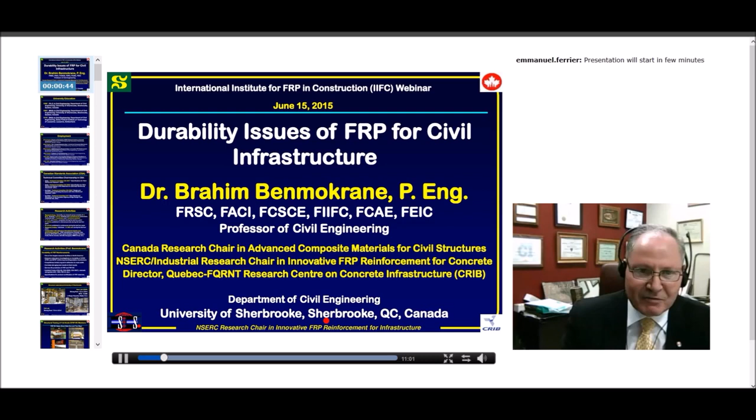Briefly, my university education: I graduated in '79 in civil engineering from École Polytechnique Fédérale de Lausanne, in Switzerland. Then after 4 years as a consulting engineer in Lausanne, I moved to Quebec, Canada in '82, at University of Sherbrooke, and I completed my master's in '83 and then my PhD in '86 at the same university.

From '95 to 2009, I think some of you know that we had here in Canada a research network of centers called ISIS Canada, and the impact of this center was really huge here in Canada and in North America. So during 14 years, we worked in this field of FRP.

Internal, external, and also we worked on structures monitoring using fiber optic sensors and things like that. This was a huge achievement made through this network of centers, with a lot of development of codes, design guides, and so on. Still now, the Canadian industry and also North American, and I can say also the world industry, are still benefiting from the findings of this Canadian Research Network of Centers of Excellence.

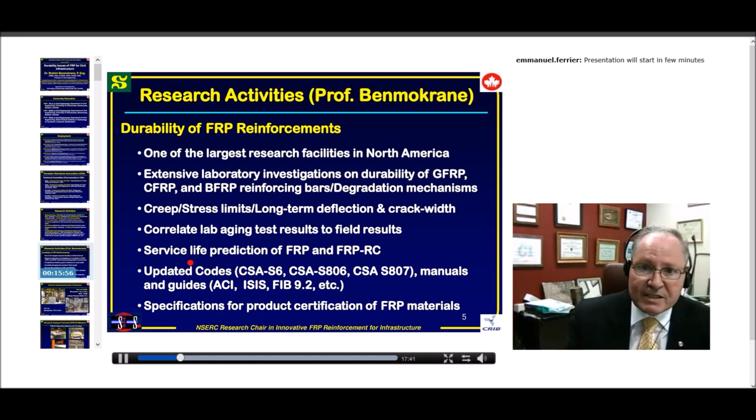Briefly, before going to the main topic of today, I wanted to show you some projects that are already completed, or some that are ongoing. You can see here, I will be coming back to the durability and material issues. So here I will be showing the next slides mainly about structural testing.

This is a view of the old structural labs that we have. It has a strong floor, 10 meters by 20 meters. You can see here one full-scale underground chamber under test. We can see here in the back a shear wall, and here one bridge pier under testing, and so on. We have many graduate students using it.

Also, in 2009, we had a new structural lab, which has a strong floor 12 meters by 20 meters. We have an MTS machine, 16 meganewton, and as you can see, some L-shaped reaction walls, 12 meters. I use these walls mainly for testing shear walls. I am planning in the future to test here a building with 4 floors, including slabs, beams, and columns, internally reinforced with FRP, and look at its behavior under gravity load and also under lateral load, mainly for seismic.

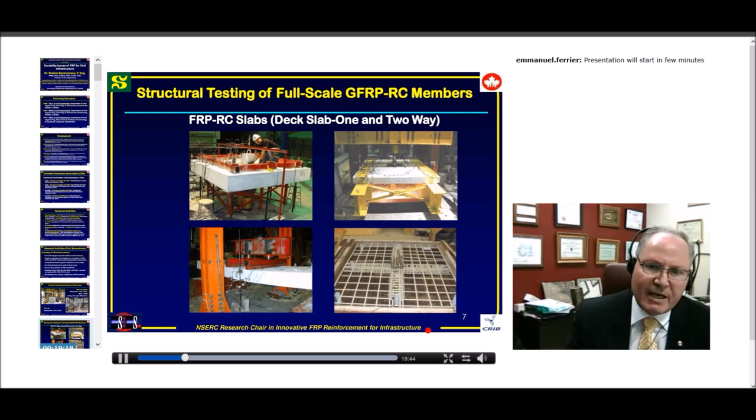These are all structures that our lab and graduate students have benefited from. Here's some of the specimens. We can see FRP reinforced slabs, deck one-way slabs and two-way slabs that we tested during the last few years. This is a two-way flat slab for parking garages, and this is a two-way slab for bridges. You can see the flexure reinforcement and also shear reinforcement made with FRP, as shown in this photo.

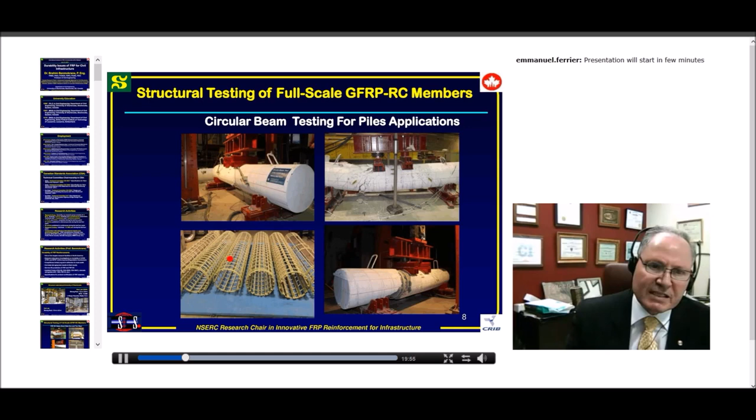Also, we tested circular beams, mainly for pile applications, under flexure and under shear. You can see here the internal reinforcement, the cages.

Also, as I said before, we tested shear walls, mainly to look at the seismic behavior, mainly for building applications.

Just recently, in fact two weeks ago, we completed testing columns. These are all reinforced with GFRP, under quasi-static loading, looking at drift, energy absorption and so on. We got very interesting results — some of the columns went up to 8% drift without any strength decrease, which is really very good behavior. We looked at the behavior with different longitudinal reinforcement and also different lateral reinforcement for concrete confinement.

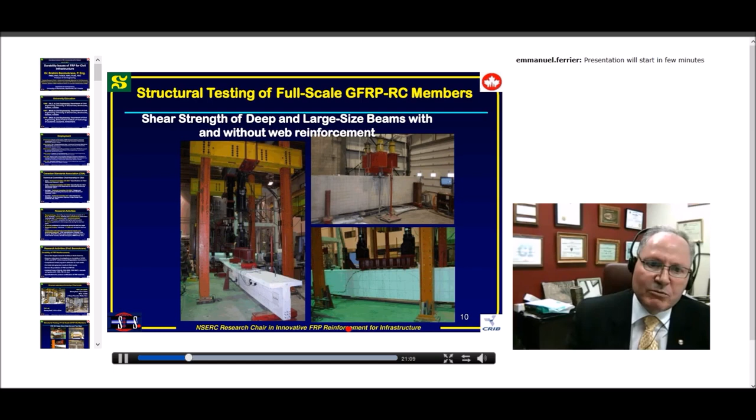Also, this is another view showing shear strength evaluation, T-beam section size effect, having 1.2 or 1.4 meter depth. This is also about deep beams that we tested with one PhD student.

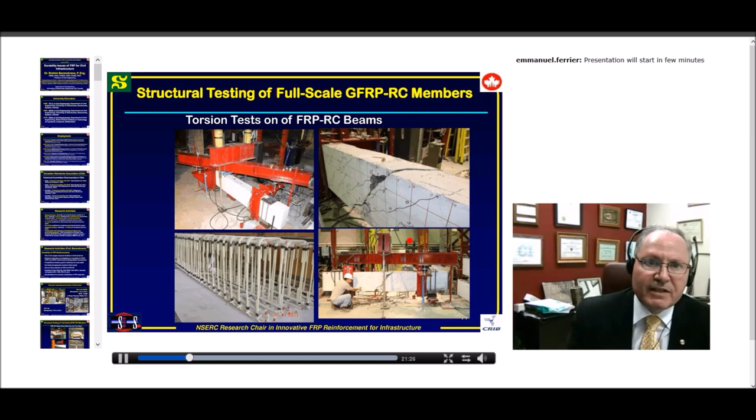Here we also did extensive work on torsion. We looked at this type of loading, which happens often in bridges and also in parking garages, to have this kind of load about torsion.

Also we tested columns — rectangular section, circular section, short columns, slender columns, with glass, with carbon, under concentric loading and also under eccentric loading. We are now establishing the moment load diagram interaction. We have really huge work on that, mainly for code development and so on.

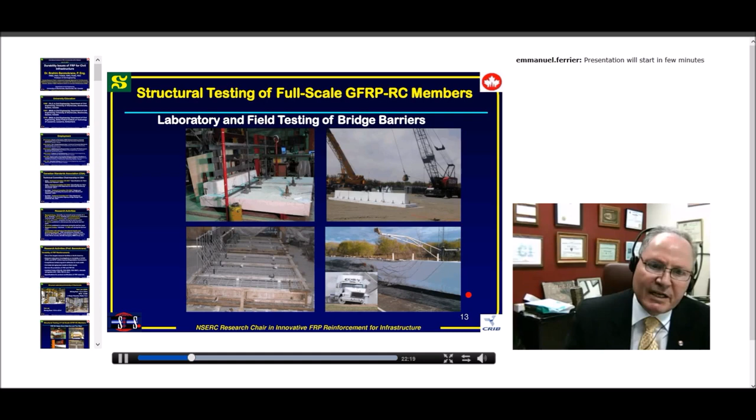And also we tested, as you can see here, bridge components including barrier walls. This is under static load in the lab, and here under impact load in the field. Also this is under crash test we did in Texas, exactly how it has to be tested to approve the material.

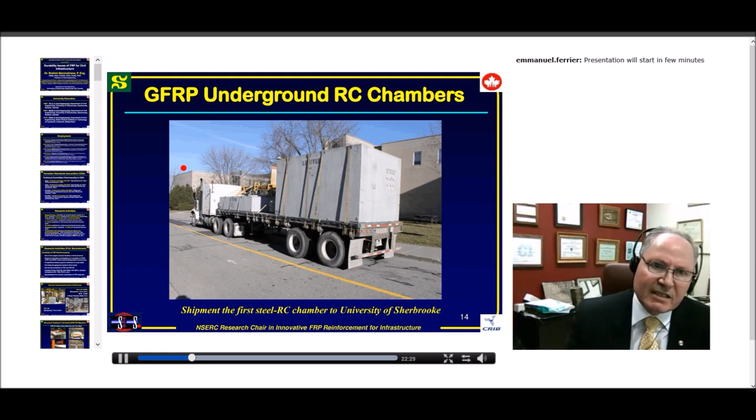Sometimes we are also bringing precast full structures for testing. You can see here the chamber, the transportation to the lab, this is during casting, and they were tested recently here in the lab. All this structural testing, of course, is from the lab, as I just showed you.

Some of this testing really helped for developing new applications with GFRP reinforcement, and of course we move it to field applications. We have to do that, as you know, because we can learn more about the material and increase the extension of the use of this kind of material.

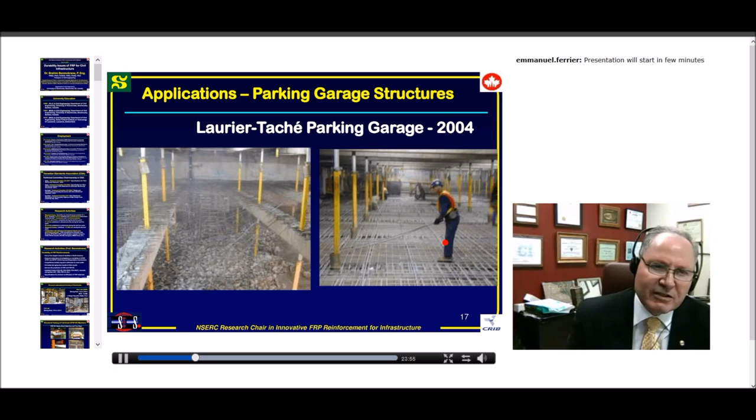You can see here another example of parking garages. This is demolition of the existing structural slab and replacing them with new slabs with GFRP. This is one-way slab, and we also did two-way slabs for parking garage. This has a span of each bay of 30 feet, which is 10 meter length — really very long.

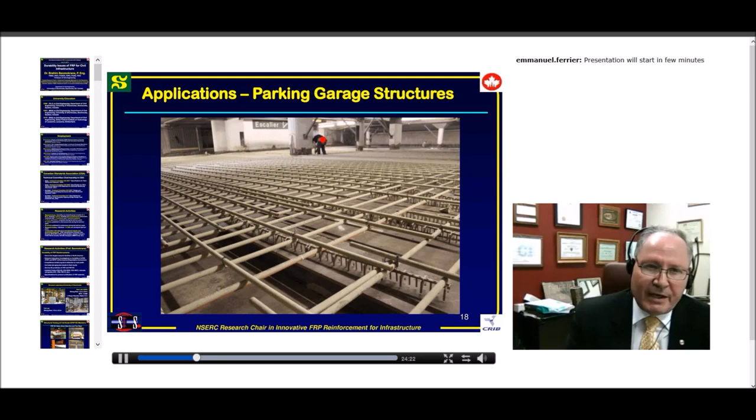It was really a challenge, mainly about the deflection, the behavior, and also about the punching shear behavior around the columns. But we addressed that very well with the designers, and all this is instrumented, so we know exactly about the behavior.

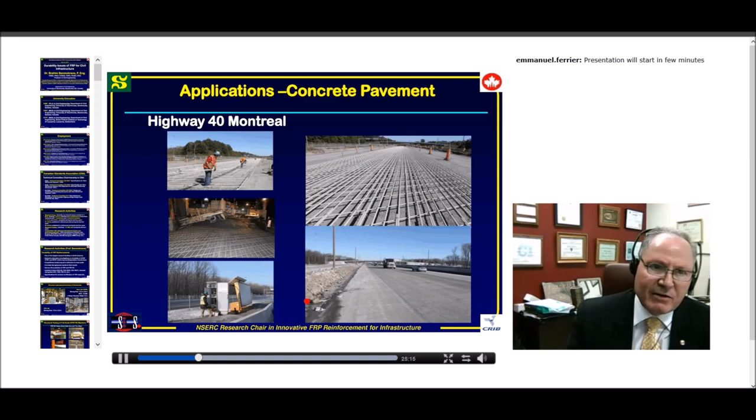We also have highway applications — this is continuous concrete pavement in highways in Montreal and also other cities.

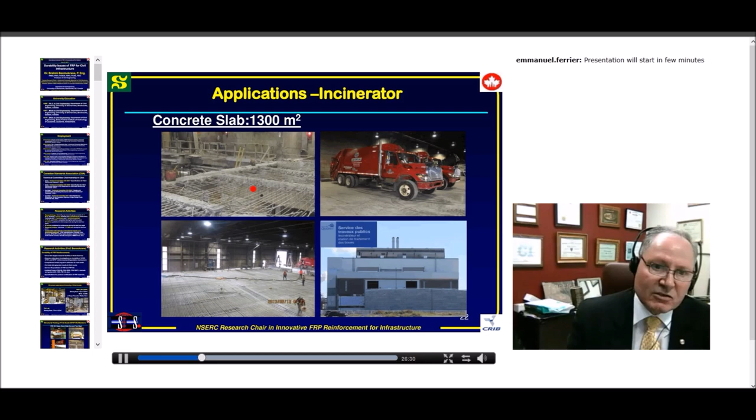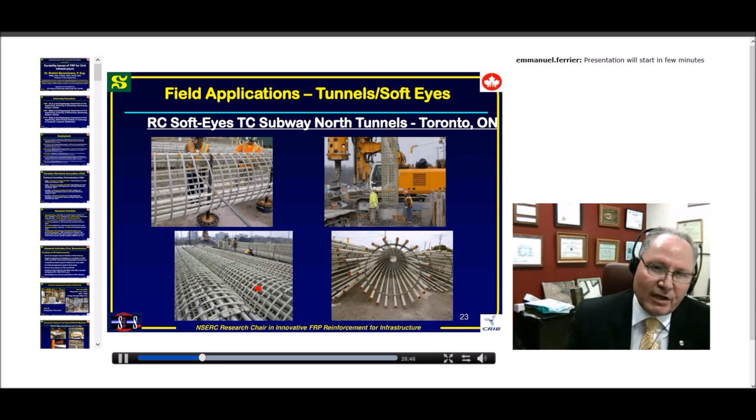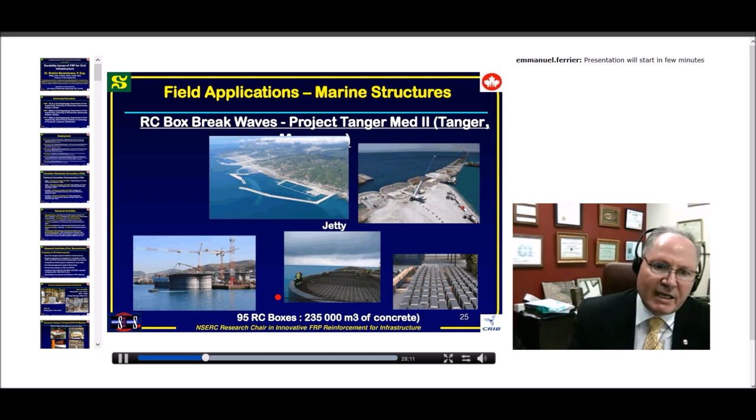So that gives you an overview of some projects that we completed in the lab and also in the field. As you can see, I think the FRP bar technology is really progressing well, and now it's being used at the international level, and I am very, very happy about that. So after this brief introduction—about 10 minutes, I'm sorry about that—I hope it was very helpful for you.

So the outline of my presentation today: after a brief introduction, I will talk about the factors affecting the durability of FRPs. I will talk about accelerated aging tests—this is how we have to do durability tests in the lab. Also, I will be talking about ISIS field durability studies; this was really a huge progress made with this field testing, as you will see later, and the acceptance of the material and so on. Specification codes and design guides—how we are addressing durability in the codes and design guides—and some concluding remarks, and I will come out with some research avenues.

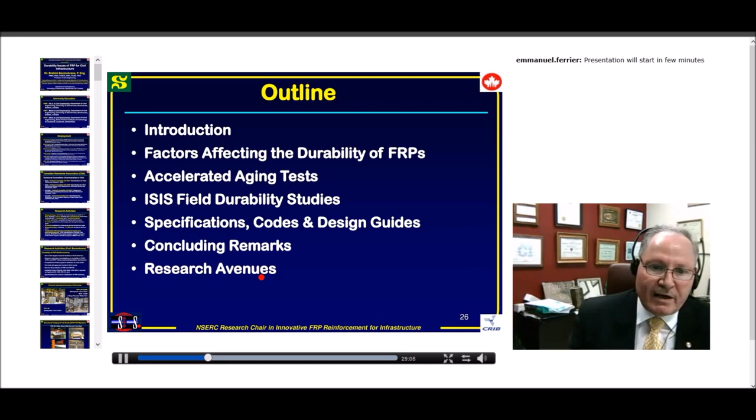Why is durability a concern? Of course, because FRP is still a new material when compared to traditional structural materials. Also, manufacturers are still doing innovation, coming up with new products or new materials, so these have to be evaluated, understanding and looking at their long-term durability. And as I told you, currently most codes are specifying a service life of 75 years or even more. Of course, the durability of this product has to be proven, that at least it will last the service life specified in the code.

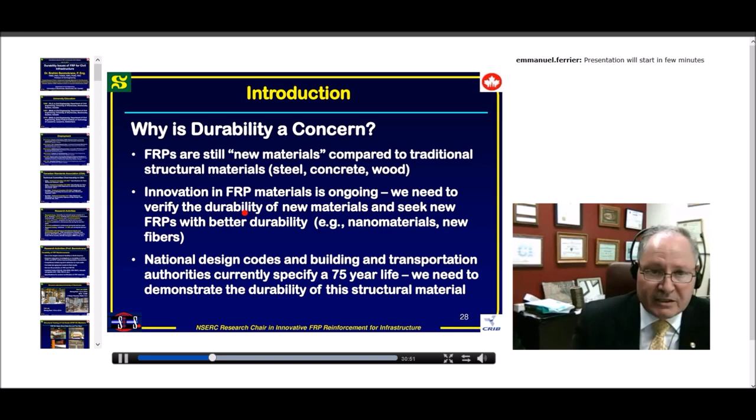Also, unlike steel, FRP is resistant to electrochemical corrosion because it's non-metallic. But however, FRP could potentially deteriorate following exposure to some specific environment. We can see here physical loading and moisture.

This is really the main critical issue, because without moisture the durability will be, I think, no problem at all. Temperature also could affect it, depending if we are talking about fire or some application in the Middle East.

Chemical exposure, of course, mainly with concrete, so we are talking about alkaline solution, but it could be also another chemical.

The rate of deterioration, as I explained before, will depend on the type of fibers, the resin matrix, and the fiber matrix interface. For example, I am working on basalt bars during the last few years, and now one of the main issues about long-term durability of basalt is really dealing with the fiber matrix interface, because the industry is still facing problems with the sizing and finding material which has really good compatibility with the resin. So it's still really under research and one of the key issues to be addressed in the coming years.

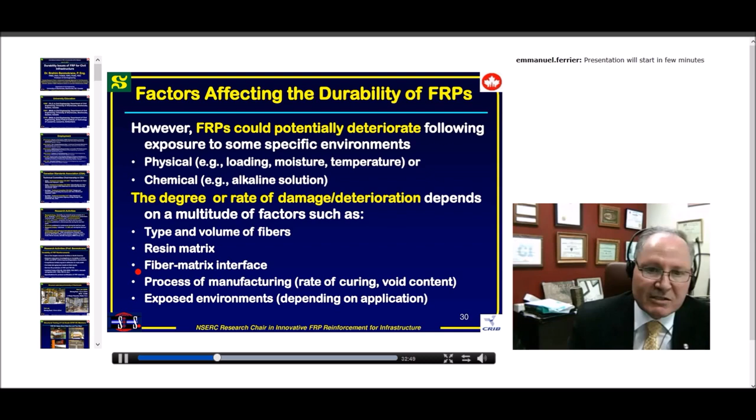Manufacturing process is also important, mainly the rate of curing and void content. I will show you some slides later about that. And the exposed environment depends on application, as I said before. Sometimes you can have freeze-thaw, in other cases marine application, and so on, so it has to be addressed.

When you have this debonding and delamination, you are losing one of the main criteria for the material to act like a composite. Because when you lose the interface, the whole system is not really acting as a composite, and you can have a decrease in strength, because there is no stress transfer between the fibers. So we know exactly how the material degrades, but we know a little bit less about the interaction, because we can have interaction or synergic effects.

As you know, by combining load and chemical exposure, we can have some synergic effect, and this we don't really know too much about. From a research point of view, it needs some study of the synergetic effect, by combining load, temperature, moisture, and so on. I can see this as a direction to look into this kind of behavior in the future.

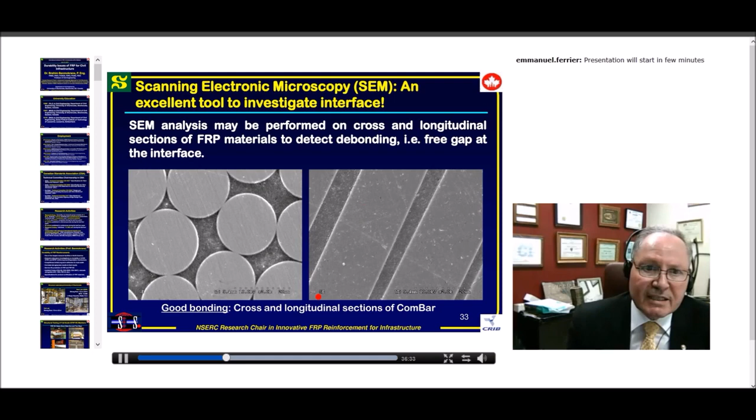And this is one of the bars. I think it's from Schöck that I did this investigation, and this is how it was done. I can come back with the manufacturing process.

If you look to the rebar, there are mainly two manufacturing processes, both made with pultrusion. Some use closed die pultrusion, and others use open die pultrusion. When you use closed die pultrusion, you don't have access to the bar during fabrication, so it's not really in contact with the atmosphere, and in general there is no void, as I showed with the Schöck.

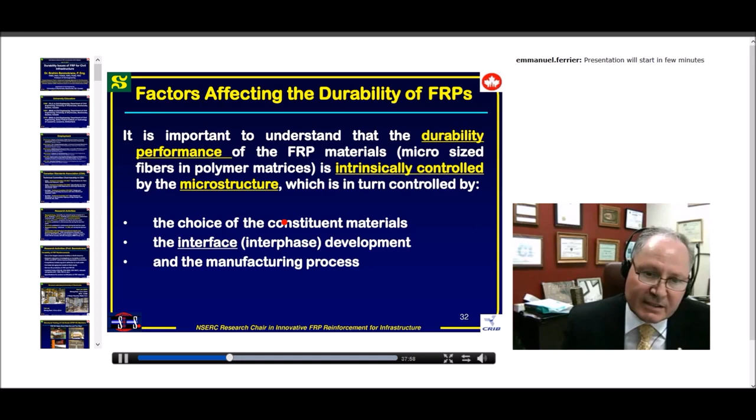But this is for the external surface, you have to add sand or do grooves or something like that after you made the smooth bars. When using pultrusion with open die, you have access to the rebar during manufacturing, and you can add helical fibers or any external deformation before the polymerization of the resin. But as you have access, it means it's in contact with the atmosphere, so you can have some pores. So the thing is to have well-distributed pores, as I will show you later. This is really extremely important.

Also about the interface characterization, you can do it before testing and also after testing, like on a fractured area, and this gives you a very good idea about the interface. As you can see here on the left, this is on a fractured area, and you can see the resin is still bonded to the fibers, meaning a really good interface and showing the integrity of the interface. But as you can see here on the right, you can see smooth fibers, and all the resin was removed because the failure was mainly at the interface, which is really poor bonding. So this will really explain it to you.

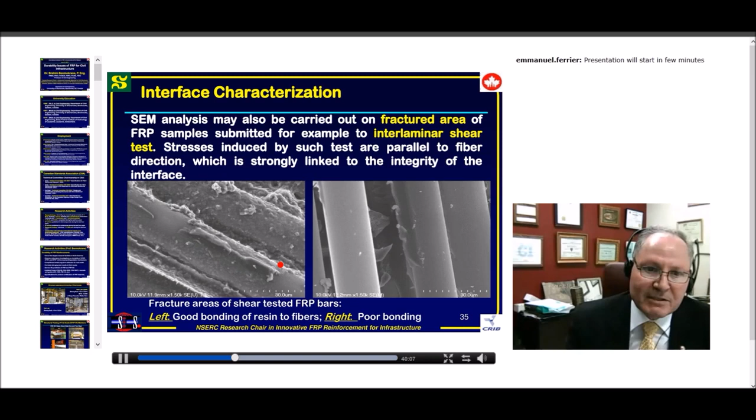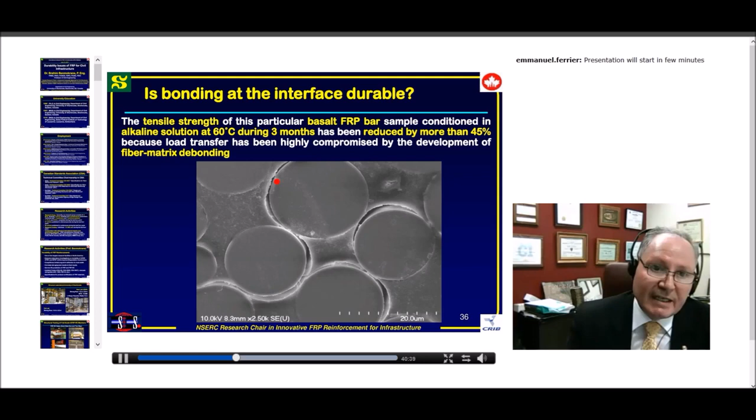One of what really happens in the interface when you have a problem with the interface, and this is with basalt bars. As you can see, this picture comes from a bar sample conditioned in alkaline solution at 60 Celsius during 3 months, and the strength reduced by more than 45%, and you can see here the fibers debonding, which induced the huge strength decrease.

Glass transition temperature is really a thermal property which is extremely important. We can do that with DSC, or we can do that with DMA. We have ASTM standards on both methods. But either way, it gives a very good idea about the long-term stability of the resin, and by investigating the glass transition temperature, we can know more about the behavior of the resin.

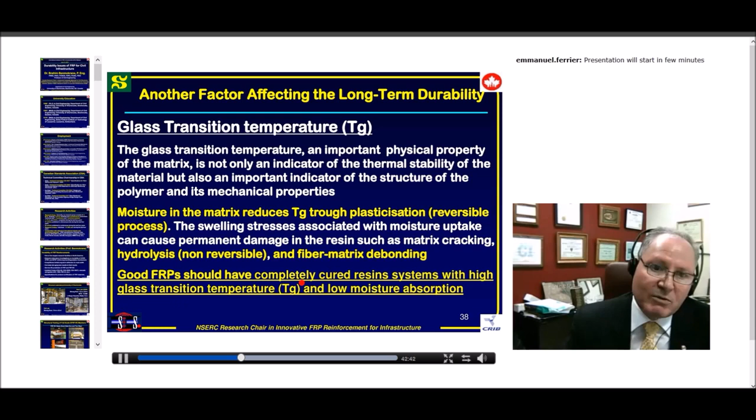As you know, when it's made by hand layup, we also have to consider this thermal property, of course.

This is the result from DSC. We have cycle 1 and then cycle 2, and as you know, because we did cycle 1, we already heated the polymer resin. This shows that there is post-polymerization happening. But when we did cycle 2, it's a continuous straight line, so the system was now fully cured, and as you can see, we jumped the TG from 62 to 85 because we did some post-polymerization, showing that the resin is linked.

Okay, this is my phone. I'm sorry about that.

Primary durability in FRP, of course, as I said before, when we are using FRP in civil engineering, we are facing different kinds of environment and different kinds of load, as you know.

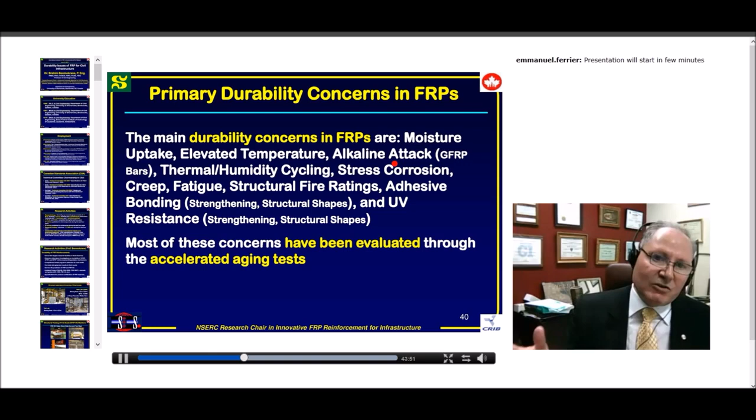So it can go from moisture, as you know—we cannot avoid the presence of moisture in civil structures. We can have temperature depending on the application. We can have elevated temperature due to fire. As an example, we can have alkaline attack, and as you can see, there is really a variety of environments. Of course, we have to look at mostly all of them, since some could affect more than others.

As we know, for internal reinforcement like GFRP, alkaline is one of the critical issues, and we have to look at it before looking at the rest. But as I mentioned, please keep in mind about moisture. If the application of the FRP doesn't have too much moisture, I think everything will be fine with long-term durability.

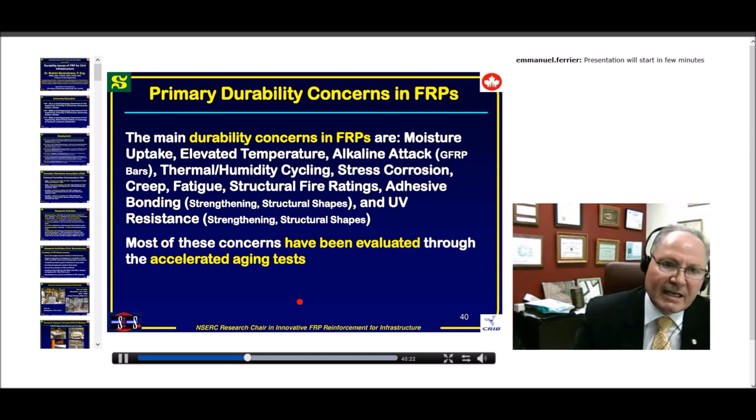Of course, by addressing this in the lab, we have to generate data for long-term behavior. We cannot build structures and wait 75 years or 100 years to know if the material is durable or not. So in general, during the last few years, researchers developed what's called accelerating aging tests, and this is mainly by accelerating the degradation using elevated temperature.

But we have to understand accelerating aging tests. I can recommend to you a book written by Nelson—it's really an excellent book, and you have to look at it. It applies this accelerating and service life prediction to all kinds of products. Even sometimes when you go to Toys R Us to buy something for your kids, that product was also tested under accelerating aging tests because we need to know how durable the material is. But of course, we can use it also for civil engineering and FRP reinforcement.

But there is an assumption that degradation is caused primarily by a single chemical reaction. Otherwise, if you have 2 or 3 reactions, you cannot use accelerating aging test. So if the assumption is correct, then the rate of reaction can be increased by increasing temperature, and specimens are aged by placing them in a solution bath, as we are doing.

We believe strongly that our degradation is mainly coming from chemical reaction. It could be from the resin, or mainly from the interface, or it could be from the fiber, as I explained before. And of course, we can see this when I explain later, when we'll be drawing the results and the curves—we can see if this assumption is fulfilled or not.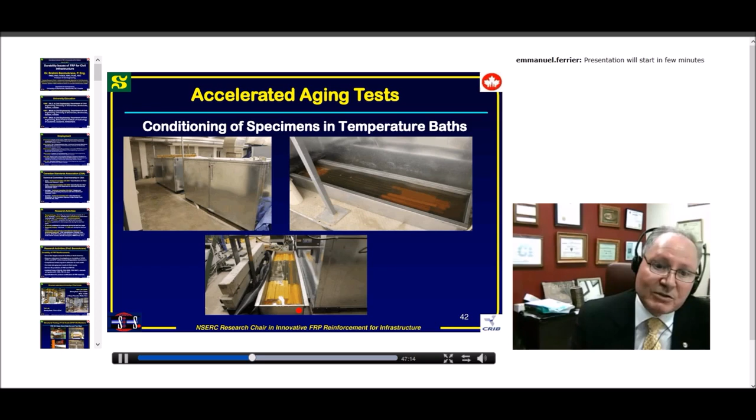So conditioning here, I'm showing specimens in temperature baths. This is all of them. It's not really under load, because if we have load, we will have a synergetic effect, which could also be investigated separately. But mostly we are doing that without load, and we are limiting the load, of course, to the minimum so as not to induce any other problem.

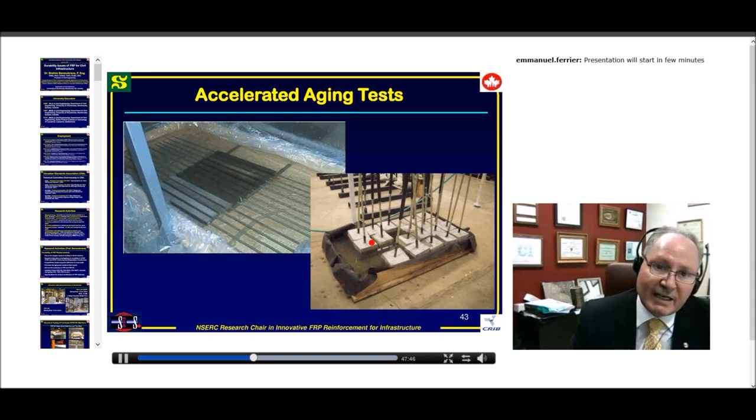This is what I showed you before: the bars or the FRP are directly immersed in alkaline solution. Sometimes it could also be like here, where the bars or FRP are embedded in concrete placement, and we have them in water—so we are directly using the concrete as alkaline. Also here we have bar in a concrete block, and this is mainly looking at the long-term bond and if there is any degradation at the interface.

Also we can have them under load, as I show you. This is some of the testing here in Sherbrooke that we did during the last few years. I'm showing you some slides from the research lab that we have here in Sherbrooke.

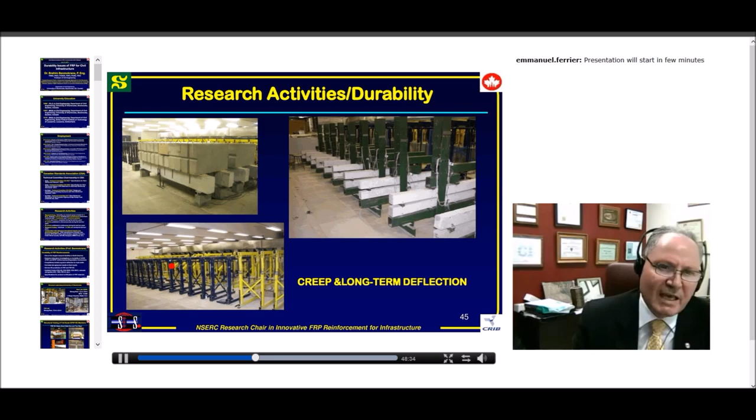As you can see here, we are also investigating the long-term deflection. These are from 2007, 2008, and this is all loaded under service load, as you can see here, with gravity load from the concrete blocks. Also here we have beams of small size, and this is really full-scale beams. And also we have here creep frames under load, different load and so on.

We can do them also in beam, as you can see here. This is under freeze-thaw cycles and under sustained load, and then we can look to the long-term behavior by investigating the deflection behavior and also the capacity of the beams, and also we can extract the bars from the specimens and do the tensile test. We can do really a variety of testing, mainly about the objective that we are looking at.

Here the cycle was done from plus 20 Celsius to minus 20 Celsius. And this data was really very helpful, as you know, to develop new codes, new standards, and also to convince engineers to use this material, showing them the performance of the material under such environmental testing.

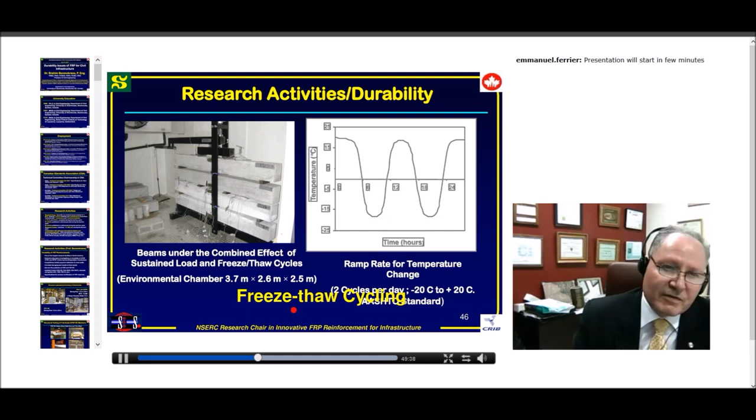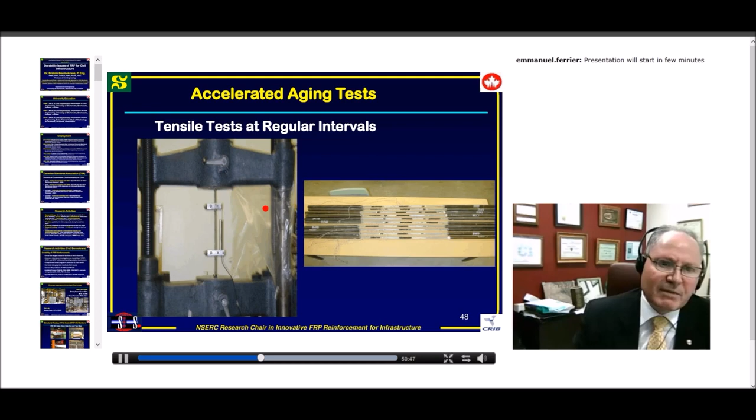Okay, then after we can also run the tensile test. This is mainly for the strength retention, as you can see here. You can do it here. I'm showing it for rebars, but you can do it also for the external reinforcement, like laminate and so on. And then, from this test results, we have here the tensile strength, and this is an example.

Showing it in water, we can also derive the same result from alkaline solution. This is about the days in conditioning, and we have different temperatures: 80, 60, 40, and 23. And as you can see, as we are increasing the temperature, the strength retention is reduced.

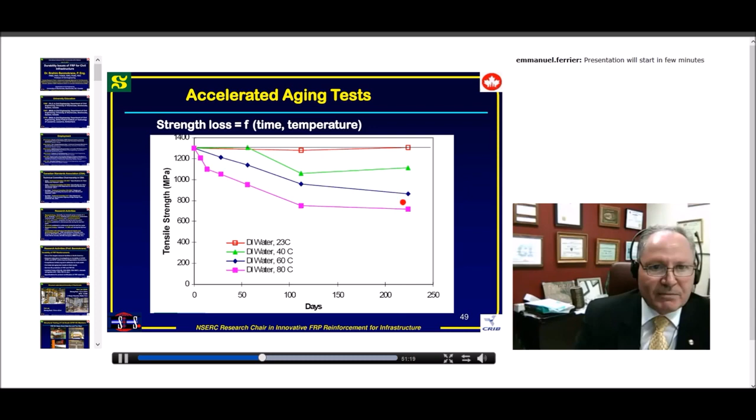And from this we can derive long-term strength. So to use and derive long-term strength, of course, this is based on the Arrhenius relation, as I said before. And here I am reporting one procedure developed by Larry Bank in 2003, which needs 3 temperatures of aging and 4 periods of immersion.

So here it could be like 20 ambient, 40, and 60, and here it could be 4 periods of immersion, like 45 days, 3 months, 6 months, and 1 year as an example, or 1,000 hours, 3,000 hours, 5,000 hours, and 7,000 hours, something like that.

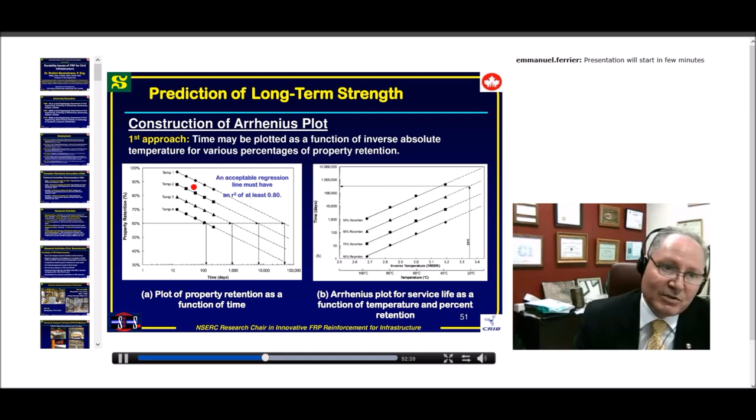And from this, this is from Larry Bank, we can draw these kinds of curves. And if we look here, all the curves are really parallel, so it means we have only one degradation mechanism, to which the Arrhenius relation will apply. Otherwise, if they are not parallel, it means we have some combined, 2 or 3, degradation mechanisms and we cannot use Arrhenius. So you have to be really very careful when doing this testing, and you have to have this - it should be all parallel as shown here.

It doesn't really mean that our material, when it will be in the field, will behave this way. I think what we observed from the field is the strength will not be as what we tested in the lab, because in the lab, of course, we used a very aggressive environment. But it will give really a very good idea, and of course it will be convincing for the engineer. And we can also be very conservative, and this is what we have in our code by specifying the reduction factor that takes into account such results from the lab.

So a couple of years ago, through ISIS Canada, as I mentioned before, in 2004, we were really very interested to know about the material that we implemented in different bridges here in Canada.

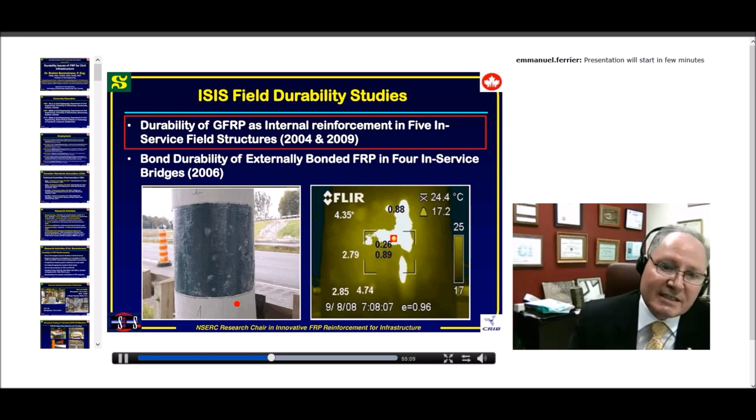I'll be focusing mainly on the GFRP because this study clearly showed that the GFRP bars were behaving very well. At the time, in the Canadian Highway Bridge Code, we introduced GFRP as main reinforcement in bridge components, because before it was only used as secondary reinforcement. This field study was extremely helpful to introduce GFRP as main reinforcement.

This is a photo showing the people involved in this 2004 ISIS durability study. You can see myself, Dr. Nemy Banthia, Aftab Mufti, and Mohamed Boulfiza, from British Columbia, University of Manitoba, and University of Saskatchewan.

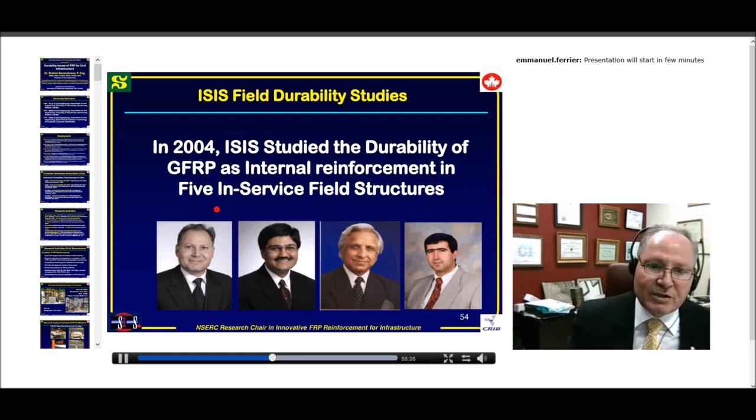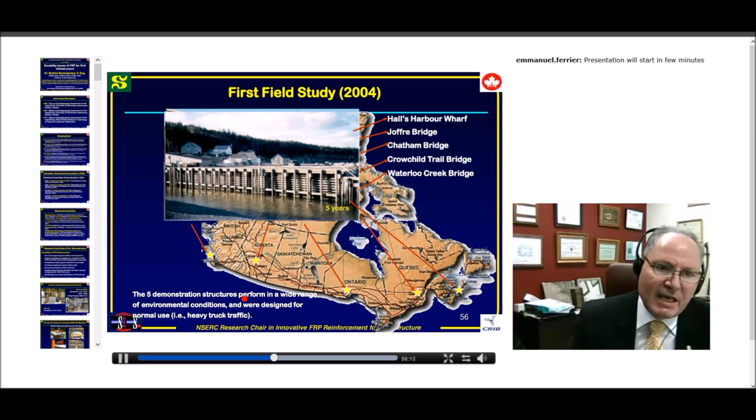So what we did, we took cores from all 5 bridges: Joffre Bridge here in Sherbrooke, Crowchild Bridge in Alberta close to Calgary, Halls Harbor in Halifax, Nova Scotia, Waterloo Creek in British Columbia near Victoria, and Chatham in Ontario. We did microscopic and physical-chemical analysis, looking through the microscope. We took cores from these structures and from 5 demonstration projects.

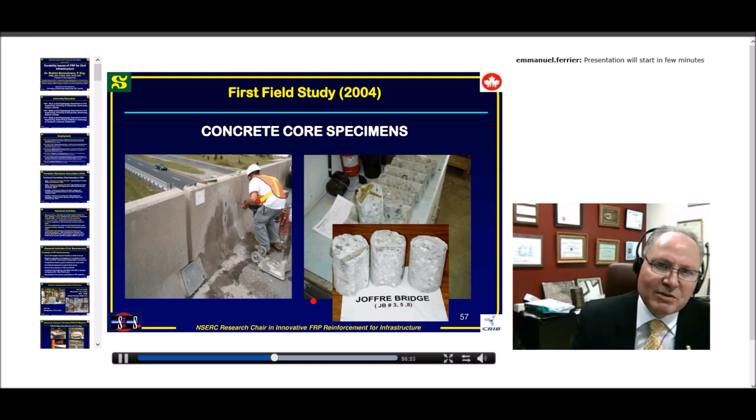You can see here the cores, you can see the bars. We took them from the barrier walls, from the sidewalk, and from the slabs. We sent them to the 5 universities and performed all the tests independently by 3 research teams located at University of Sherbrooke, University of Manitoba, and University of British Columbia, and also Saskatchewan with Mohamed Boulfiza.

This is the technique we used in analysis. We looked at the GFRP-concrete interface using optical microscopy, microcracking, and physical degradation of the fiber and resin. We looked at the glass and resin interface by SEM analysis, degradation and thermal properties by DSC, chemical degradation of resin by infrared, and concrete structures by X-ray diffraction. We also did EDX and many other analyses.

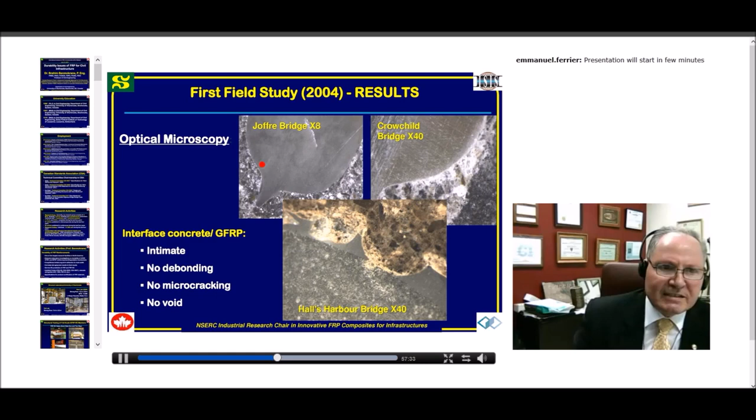Here are some slides showing the optical microscopy near the interface, showing 3 different structures. We can see the interface is really intimate, with no debonding, no micro cracks, and no voids in the GFRP.

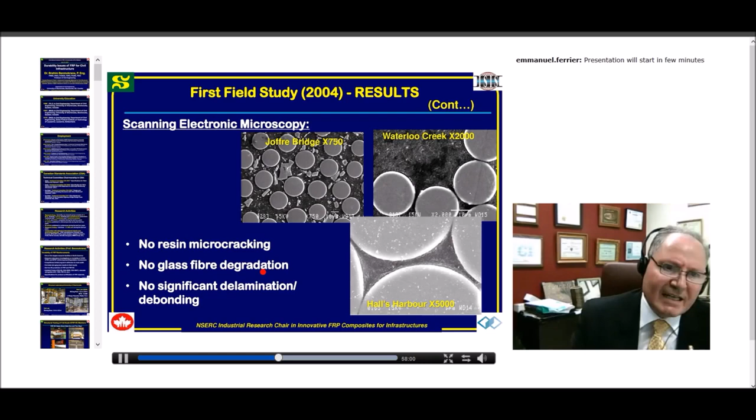This is about scanning electron microscopy. I'm showing some slides here, but we did hundreds and hundreds of specimens, and thousands of pictures. Looking at them, we did not see any resin microcracking, no glass fiber degradation, or any significant delamination in this material.

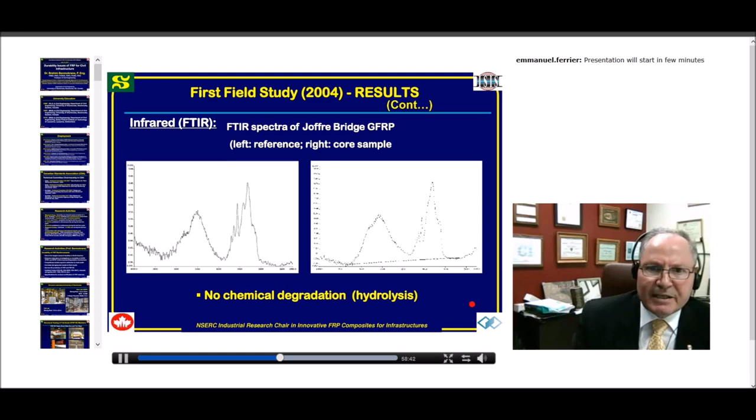At that time, the structures had 5 to 8 years of service condition. Of course it's not too much, but it shows something, because I remember at that time, in 2003-2004, we looked at some papers done by researchers using lab testing, and they were showing that GFRP, when put in concrete, starts degrading immediately. Some papers, published in ACI Structural Journal, were showing the service life could be as little as 1, 2, or 3 years. But from our results, even at 5 to 8 years, we found no degradation. It was really very encouraging and very positive.

And we decided to introduce the GFRP as main primary reinforcement in bridge components, but limiting the stress to a maximum of 25%.

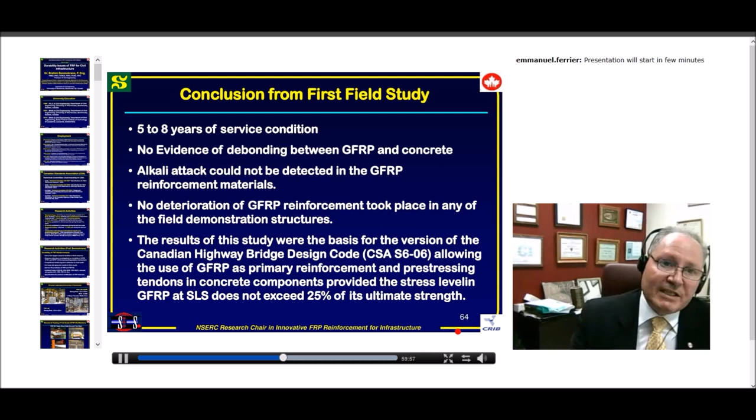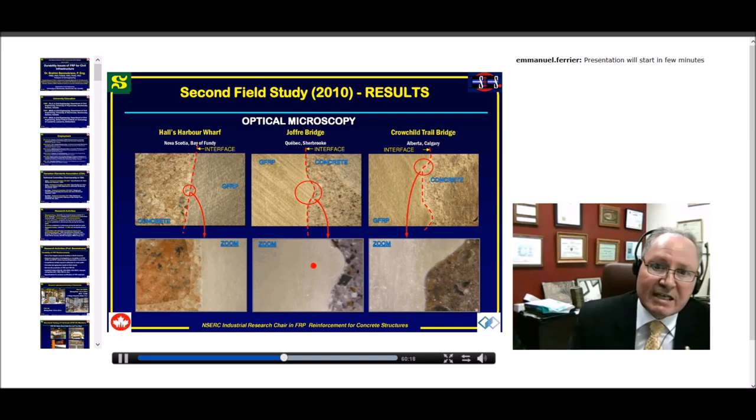This is another bridge, the Joffre bridge, as you can see here. It's really very positive results, and we are planning maybe to repeat this kind of field study by 2016.

At that time we will have almost close to 20 years of data, which is good. I can tell you there are hundreds and hundreds of structures here in Canada and in many other countries using GFRP. The reason people are using GFRP is cost, because cost is really the key issue when you're using new material.

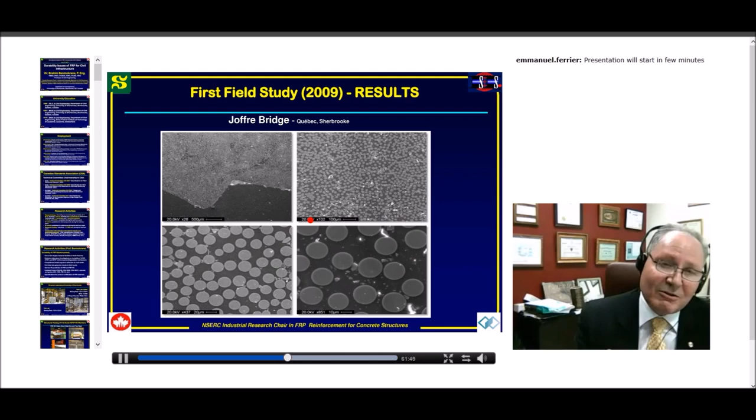And of course GFRP has lower cost compared to carbon, aramid, or any other FRP. So this is the reason why. Now, even from the field applications I showed you before, parking garages, bridges and many others, we did cost analysis comparing the same structure reinforced with steel, black steel, galvanized, or epoxy coated bars, compared to GFRP. We are really not looking at the life cycle cost, but only the first cost, and even the first cost is almost the same as using GFRP or using other metallic reinforcement like galvanized or epoxy.

Of course, now most of the North American authorities are specifying GFRP and stainless steel, and even making GFRP better, because it's 3 to 4 times less costly than the stainless steel rebars, which is really very good news.

So from my point of view, the use of GFRP rebars will expand in the coming years. I know the industry is coming with improved fibers, better resin, and now I'm working with some companies that are enhancing their manufacturing process, mainly to produce the bar a little bit faster, to be able to produce more bars per hour, for example.

So they can also reduce the cost during the manufacturing process, because the cost of the manufacturing process can be, depending, 50 to 60% of the total cost. So if you can work on that, I think we can make this product even more competitive compared to the other reinforcement. Now I will talk about some material specifications.

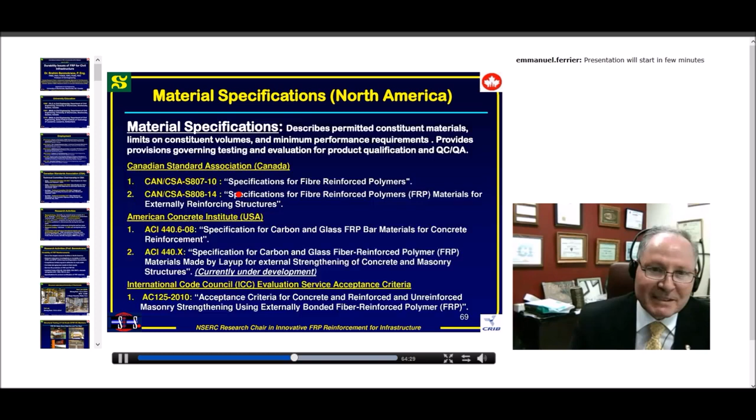So about the North American, this is for the internal reinforcement. This is the Canadian one, and it was really at the time the first code in the world, the first standard. Now we are working on internal reinforcement from both sides, Canada and US. We are working, and I think we will have it by next year. It will be an ASTM standard dealing with the material specification for deformed and sand-coated GFRP bars.

The document was balloted, I think, 2 or 3 times, and from my point of view it will be ready maybe by the end of the year. I hope that this international ASTM standard will be used internationally or globally. I think this will be fine, to have something used all around the world. I am involved in this ASTM mainly with my colleagues Charles Bakis and Russell Gentry, who are the chair and co-chair of this ASTM committee.

Also we have, as I said, external reinforcement standards. This is the Canadian one, and this is also really one of the first standards in the world. I know Emmanuel Ferrier is a member of this technical committee, and we came out with that in 2014. The equivalent one from ACI is in 2013. I will show you some slides about these standards later.

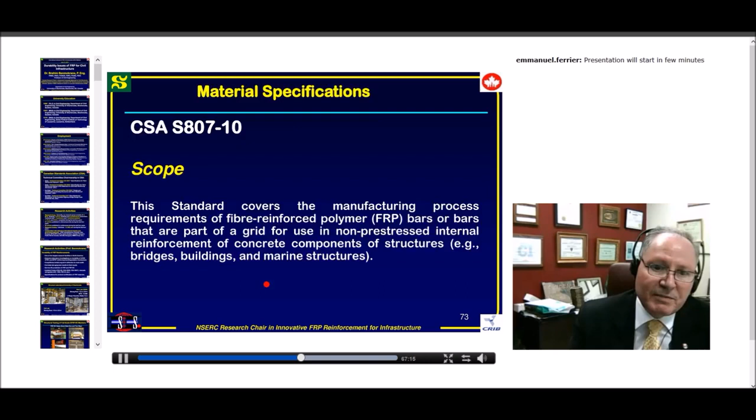And this is very good for both the engineers and users, and also very good for the FRP industry, because if we don't have the standard and any industry could manufacture bars, we could have huge problems and catastrophic failures, and everything we did during these 20-25 years could be lost in one minute.

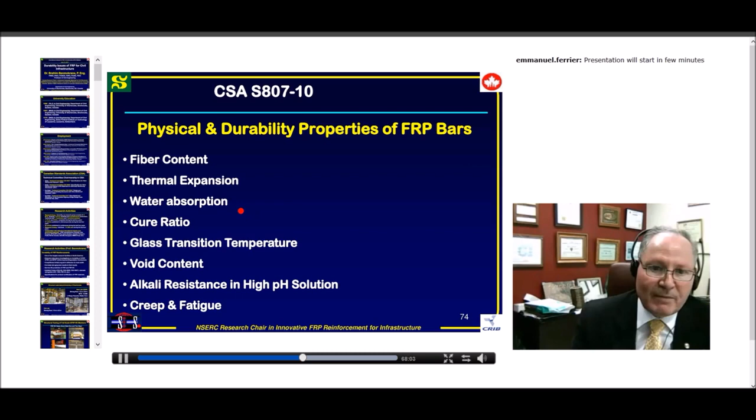So we have the physical and durability properties. All this kind of properties have to be evaluated. Mainly here you can see alkali resistance in high pH solution, void content, cure ratio, water absorption, and creep and fatigue also has to be done. I don't really want to go through all this, I'm just showing you the property here on the left, and then the qualification test.

Here we have the manufacturer quality control, specifying how many tests they have to do. The owner quality assurance is for field application, and there is also something that could be provided as a request. Here we have the test method specified, and here we have the specified limits, giving a number. So this is how it works: property, qualification test, manufacturing quality control, quality assurance, provided as request if it's not in industry, and then test method and specified limits.

We have these for fiber content, water absorption, glass transition temperature, and so on, with the number of tests, the number of lots, and so on to be tested, as you can see here.

This is a summary of durability-related provisions: limit on diluent and certain fillers, limit on low-profile additive, which manufacturers mainly use to control shrinkage. Non-blended resin - we are not allowing two types of resin, it has to be the same type and category. Lower limit on glass temperature and cure ratio - we specify minimum cure ratio and minimum glass temperature, and material screening through physical and durability tests, void, water, and so on.

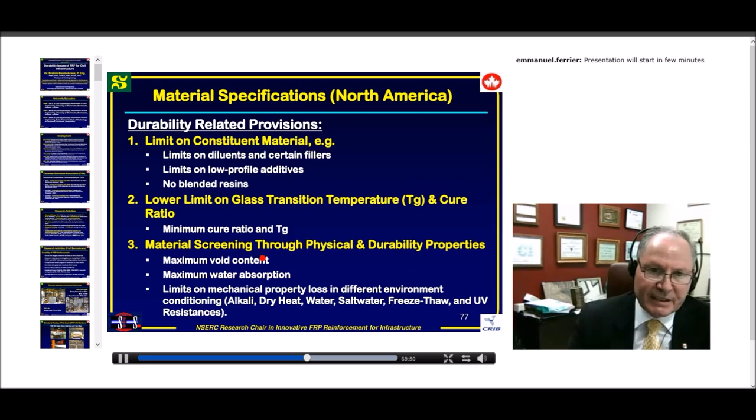Many properties, as you can see in these slides. This is an example of the limits from S807: water content, void content less than 1%. This is very good, I can tell you, for the internal reinforcement bars. If made by pultrusion open die, in general they are getting 0.5, 0.6%. But with closed die, sometimes they're getting 0.1, 0.2%, because there is no contact with the atmosphere, so the void content is really less, and also taking care about the speed to avoid cracking from thermal stresses.

Water absorption less than 0.75%. Most of them are getting this, for the internal reinforcement. You will see later when we talk about external reinforcement, we don't have the same numbers at all, because the manufacturing process is not the same, but we have lower values with the free factor and so on. Anyway, water absorption, cure ratio, glass transition temperature, and alkali resistance greater than 80%, 70%.

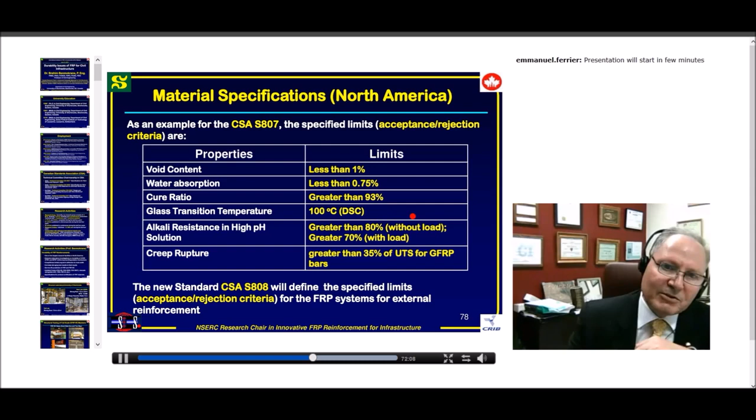We did hundreds of tests here in Sherbrooke and also in some other universities. From this statistical analysis, based on the three products that we proved to be really durable in the field, we came out with this 80, 70, and so on. Maybe in the new edition, because now all the bars have been qualified and tested, I know at least 5 or 6 that went through the whole process, and most of them are getting higher numbers, greater than 90%. So maybe we'll come out with a new number in the coming edition that we'll be preparing this year, for the 807.

Okay, next topic I wanted to talk about. This is a new slide I introduced about fire resistance. As you know, in the Canadian code we have S806 for fire resistance. I'm talking about internal reinforcement. We addressed that using some charts, which we have in Annex O in S806, addressed only with the concrete cover. It was mainly derived from finite element analysis and theoretical analysis. We used the time rating we have here for buildings by the Canadian building code, which is 2 hours for buildings.

But we were not having any test results. So when we developed the S806 code in 2012, I was one of the people responsible for the clauses regarding fire resistance, because when I show you a couple of parking garages, and when we did these parking garages, we specified a concrete cover of 60 millimeters, and at that time we said hopefully in the future we can do some tests and maybe this concrete cover could be revised.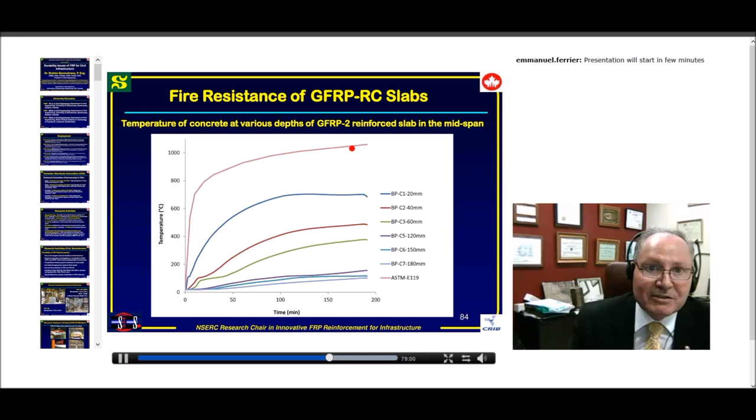And the most important result is both slabs did not fail after 3 hours, which is really 1 hour above the minimum required, which is 2 hours. One slab, you can see it here, failed at about 3 hours and 10 minutes. We were really so happy, and a lot of people and engineers attended this testing, people from the Ministry of Transportation of Ontario, Public Works of Canada, and many, many others.

As I told you, imagine if we got the failure in 1 hour or half an hour, it would be really catastrophic. But the behavior was very good, and it was done exactly by the lab, which is really recognized, following the standard.

Now what we are doing is tomorrow we'll be casting the next 2 slabs, and the test will be repeated exactly the same as I showed you, but with the concrete cover at only 40 millimeter. And I can tell you, if we can prove it, moving from 60 to 40 millimeter would make GFRP for parking garages extremely competitive, because for steel, they specify 70 millimeter.

That's for corrosion issues and many other issues. In a parking garage, if you can save 2 or 3 centimeters, it's huge on the cost. Sometimes just by excavating 5 centimeters less rock from the foundation, the cost savings are huge. You can also save on height, a lot of it. So the next results will be extremely helpful for expanding the use of GFRP in parking garages and all structures where fire is a key issue. But even with the 60 millimeter, we were really very happy about that.

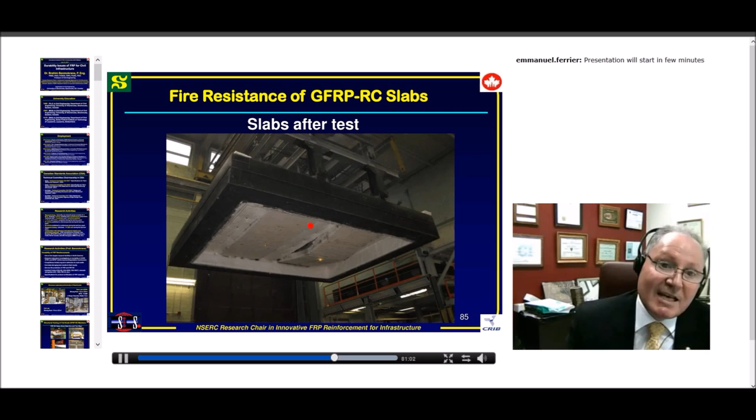So I can show you here some other images. This is the failure of the slab. As you can see here, the failure was really by tensile failure of the bars, as you can see here. This is in the middle of the span of the slab that failed. You can see the bar, it had a green color, and now it's already black, as you can see, due to the fire. It failed by rupture of the bar, and as I told you, it was about 3 hours and 10 minutes.

So it was really extremely positive results, and hopefully, as I'm telling you, we'll be repeating this for 40 millimeter.

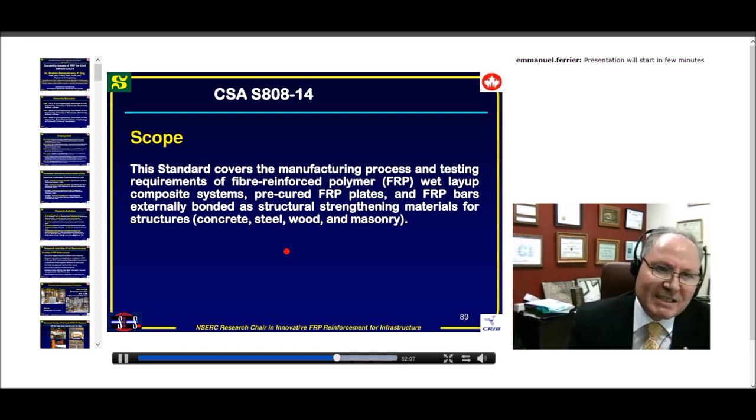Now I move to external reinforcement very quickly before concluding, to talk to you about this new standard dealing with external reinforcement, covering mainly the wet layup composite system. It's really being used for hand layup, not yet used for pre-cured or FRP bar because we have S807. So during the last few months, I did some testing mainly with 2 companies. This one is with MAPEI from Montreal, the original company is from Italy, and this is from Freyssinet from Ontario, the original company is from France. So I did a couple of tests for them according to this standard.

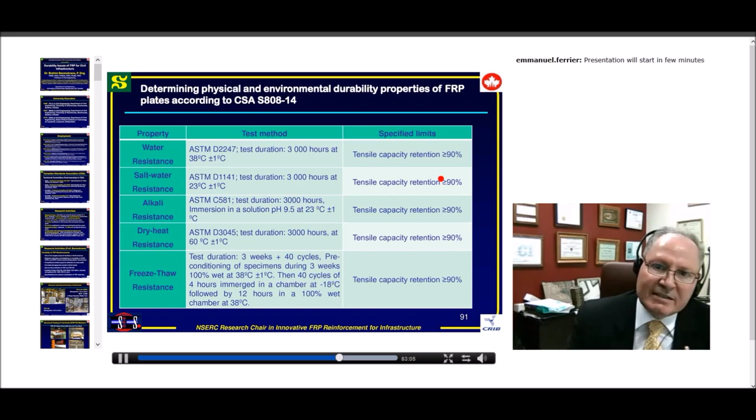According to S808 for external reinforcement, this is really the main testing we have for environmental durability. We have water resistance, salt water resistance, alkali resistance, dry heat resistance, and freeze-thaw resistance. Here you have all the duration, the standard test method, and here you have the specified limit. It's mainly tensile capacity retention, greater or equal to 90%. This is for the Canadian standard.

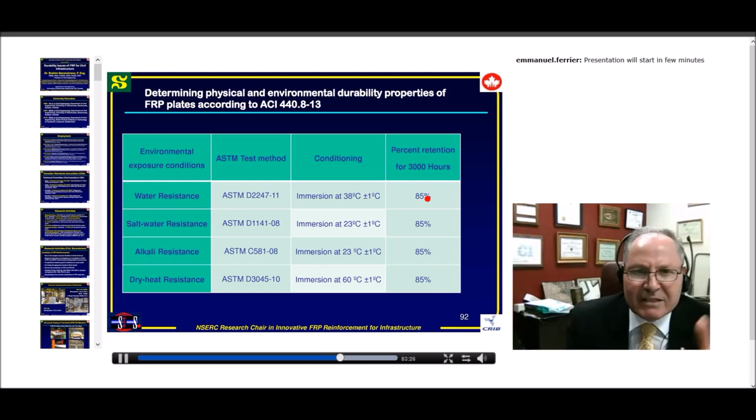If you look to the US, the ACI, we have the same testing with the same ASTM, the same conditioning, but the percent retention in ACI is, we can say, less conservative. They are 85% compared to 90% in the Canadian.

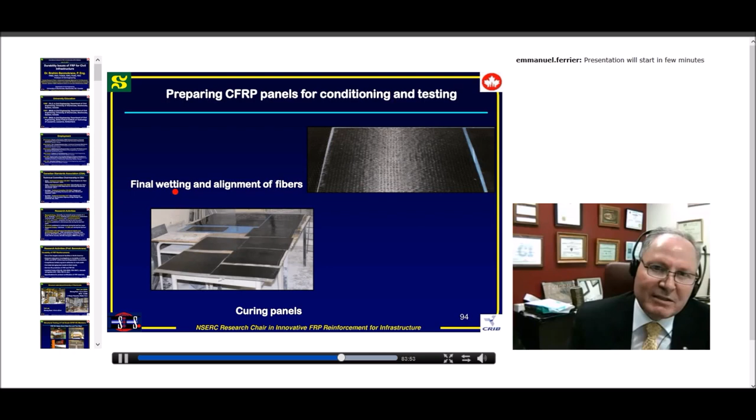We did with different layers: 1 layer, 2 layers, 3 layers, and so on. This is all the panels prepared for exposure in salt water, alkali, dry heat, water, freeze-thaw. Of course, if you are using this material in the Middle East, maybe there is no need to be qualified for freeze-thaw. But here in Canada, it's important to do that.

So we have them all here, the specimen, and then we did the conditioning, and then we cut the specimen and did the testing.

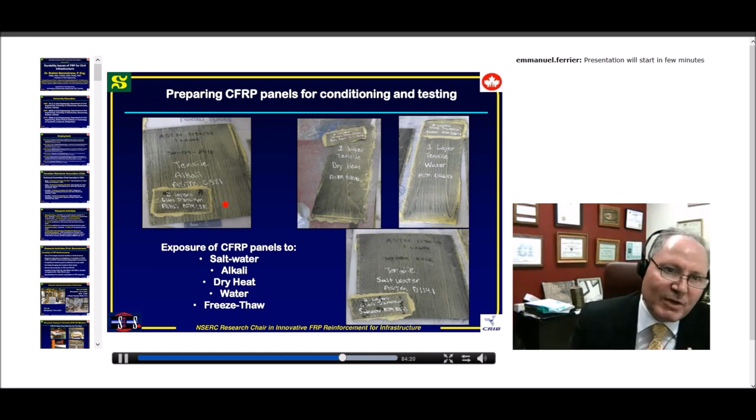For the DSC, be very careful if you are doing it, because in the standard we are specifying a number with DSC, but also we have a number with the DMA, and with DMA you have 3 approaches to determine it. If you are looking at chemical degradation, physical degradation, or mechanical degradation, you have different kinds, but there is one kind which is close to the TGA. So be careful about that.

About the design code in Canada and in US, this is really how designing the bridge code and the building code works, as I talked before, and of course you have all the Canadian codes.

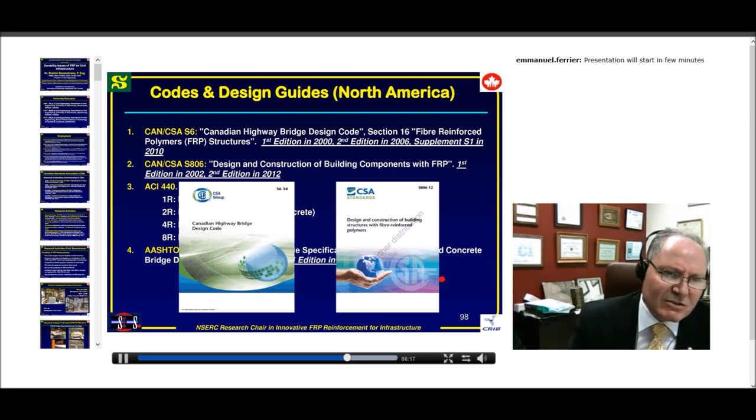But this is showing the ACI 1R, internal reinforcement; 2R, external reinforcement; 4R, test method; and 8R, I think for construction or masonry or something like that. I think it's for masonry.

And there is also the AASHTO code. This is the new ACI 440.1R. It was recently published, 2015, for internal reinforcement. The most important update was mainly about the serviceability for the deflection. We don't have at all now crack width calculation, we have on crack spacing an example. And we updated, of course, the literature review, about field application and so on. Of course, it's much improved than the previous one.

Currently, we are also working on really a real code like the ACI 318, which will be for internal reinforcement, and hopefully it will be published, as I'm telling you, as code like 318, by 2018. I am the chair of the task group dealing with shear, and I think we have 3-4 task groups, and we are really progressing very well on this one.

So here you can see, when I will be talking about code and design code, I will be relating mainly to durability. I will not be talking about the design. So the current code is addressing durability in many ways.

First of all, through the material resistance and environmental reduction factors based on fiber type and exposure type. We know that carbon fiber is durable compared to glass, depending on the exposure condition and so on. There's also limitation on maximum stresses under service load - glass, carbon, and aramid have different maximum stress under service load. And limitation on crack width under service load.

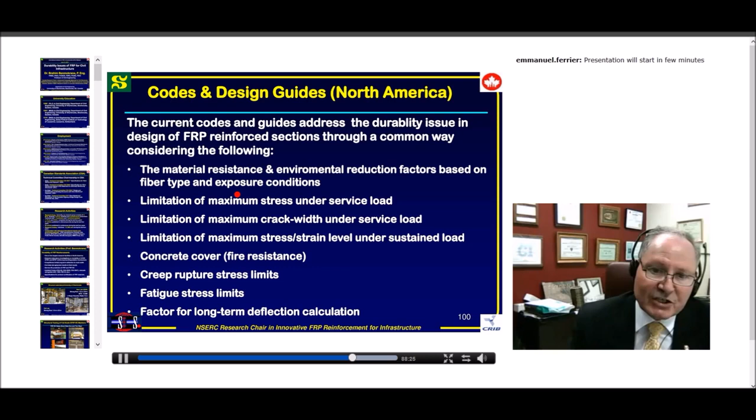Limitation on maximum strength stress under sustained load - this is mainly for creep rupture with GFRP. Concrete cover, as I say, with fire resistance. So maybe this one, I think we can make huge progress. Creep rupture, fatigue, stress limit, and factor for long-term deflection, as I mentioned in my introduction.

Some example in the S6 code, this is the Canadian Highway Design Code. Resistance factor, we have 0.55 for GFRP. This means by using the characteristic strength, which is the mean minus 3 times the standard deviation, which means this is the 99.9 percentile - meaning one value over 1,000 specimens will be less than the characteristic.

And with this value, we are using only 55%. This is how to show you how we are conservative, of course, by using this type of product. It could be maybe changed in the future.

Stress on the service load, as I said before, 25. And crack width, we put it a little bit bigger than for steel bars, which is 0.3 millimeter.

Because it's non-corrosive, advances in FRP material durability, as I said before, the industry now benefits from new materials, like high performance resin with low diffusion and permeability, better performance, consistent new materials, fiber manufacturers.

It's not really true with the basalt fibers now. It's still not consistent in the raw material and also in the variability of the material. This is really progress that should be made by the industry, mainly as I'm saying for the basalt bars. But for glass and carbon, I think this is all well controlled.

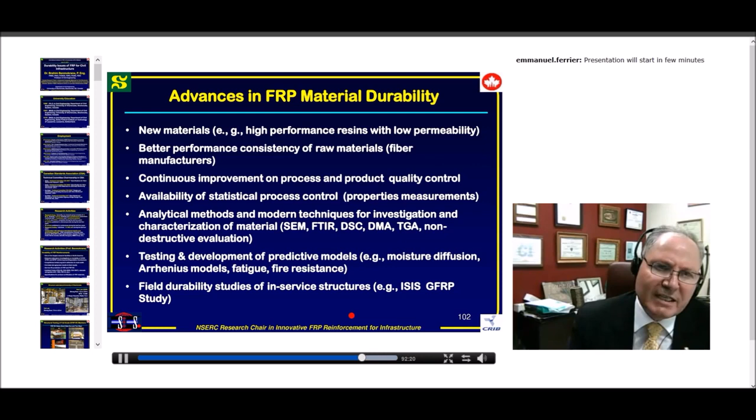So ensuring durability of FRPs, this is a key point. I'm showing here use of high performance resin system, fully cured. This is really an important topic.

Otherwise, you can have some problems with chemical degradation of the resin and more moisture absorption and so on. Minimize the formation of porosity, as I said before, and fiber impregnation also. Low moisture absorption. Select suitable sizing to ensure good bond.

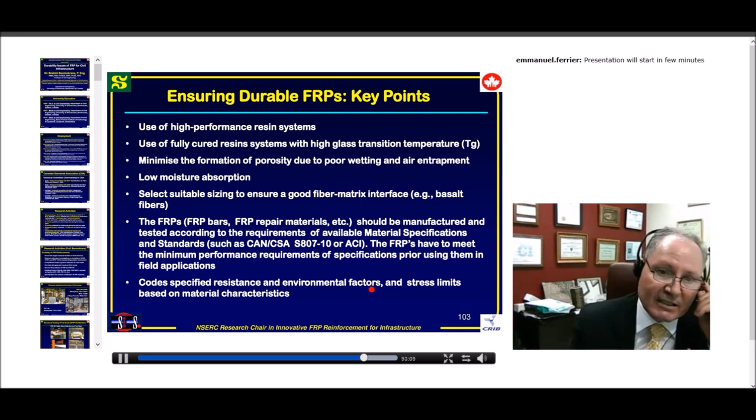This is an example with basalt I'm mentioning here. And FRP bars for repair should be manufactured - the standard has to be used. And code-specified resistance and environmental factors and stress limits, of course, should be also used in your design.

And here you have some concluding remarks. Of course, the corrosion resistance is without doubt the main motive and attraction to use FRP over steel. And now it's becoming really like a conventional material. Now the material is being, of course...

Mode of degradation, as explained before, is really well understood, but we need something really dealing with the synergetic effect, like combining load, environment, and temperature, and so on.

Test method, I think we have what we need now for testing, and applications are different now. We are getting FRP being applied really in various applications. Now I'm working on some projects dealing with driven piles. I am planning to do some testing on the US East Coast for marine applications and looking at the behavior of this material.

Glass, we've proven it's really durable. FRP bars are durable in concrete, and the durability performance of FRP material is generally very good, based on lab and also field studies. As I say, basalt still has some interface problems that need to be resolved before this material can be used in the field.

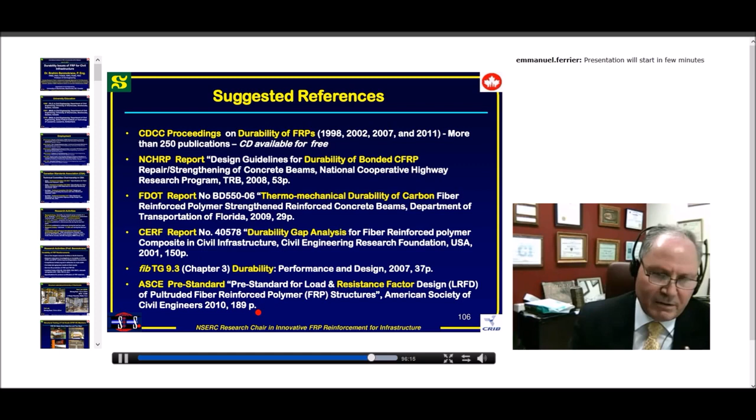So some suggested references, as you can see here. These are conferences that I organized myself in 98, 2002, 2007, 2011. I am planning to organize one next year, maybe here in Sherbrooke, next summer. So if you are doing research on durability, I will be glad to have you here in Sherbrooke. There is also this FDOT report, and some other reports that you can look at as well.